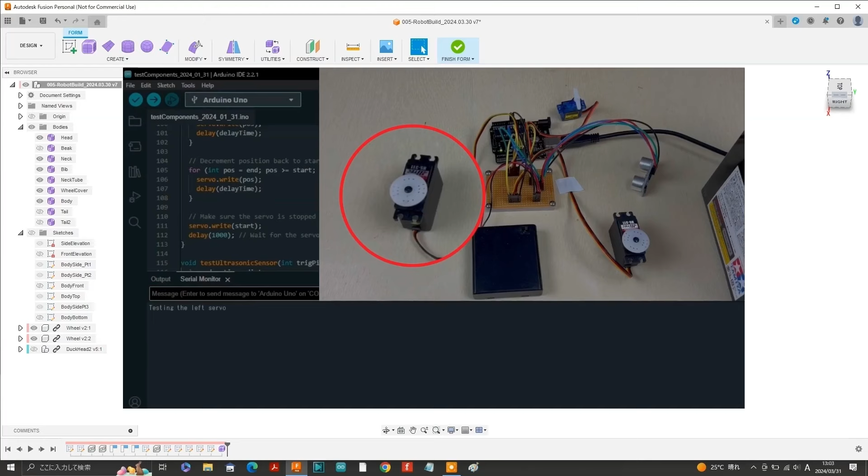In part 5, we conducted operational testing of the various components connected to the circuit board and confirmed that our design works perfectly. Now in this video, and in the next couple of videos, I'll take you through the design process. Initially, I designed the chassis without a finalized body design, resulting in an over-engineered structure that somewhat resembled a station wagon. Instead of just slapping body panels onto this chassis, I decided to start afresh by designing a robot body first. And here it is, a sleek aerodynamic design.

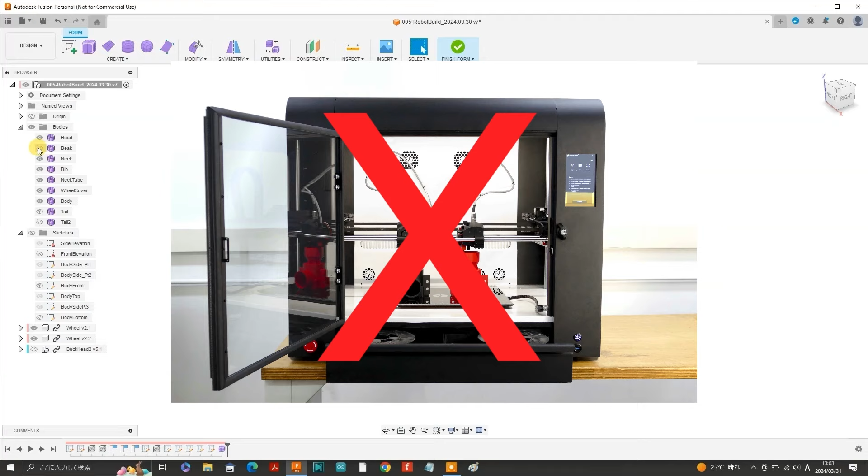Believe it or not, I'm going to create this robot body without a 3D printer. I'll be making the molds from scratch, and I'll use vacuum molding for the various curved panels. I'll be using a 0.5mm thick Tamiya Plate plastic sheet for most of the body shell.

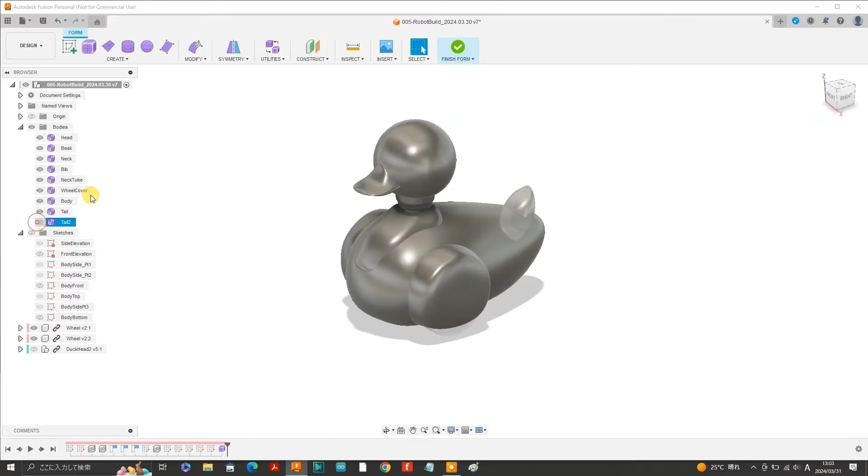But there's more to this story. The youngest member of my family insisted on a deluxe version, complete with this beak and tail. Some might say it resembles a duck, but I don't see it personally. Well, okay, it's a duck, okay? I'm making a robot duck.

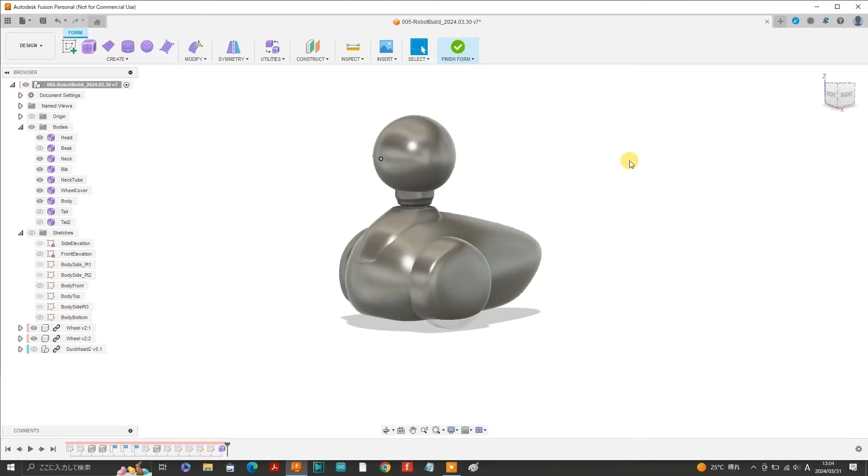If you've been following along since the beginning, don't worry, you don't have to build a duck like mine if you don't want to. I'll show you how I modeled this design in Fusion 360, so you can create your own unique non-duck robot design if you prefer. So open up Fusion 360. I'm just using the free version.

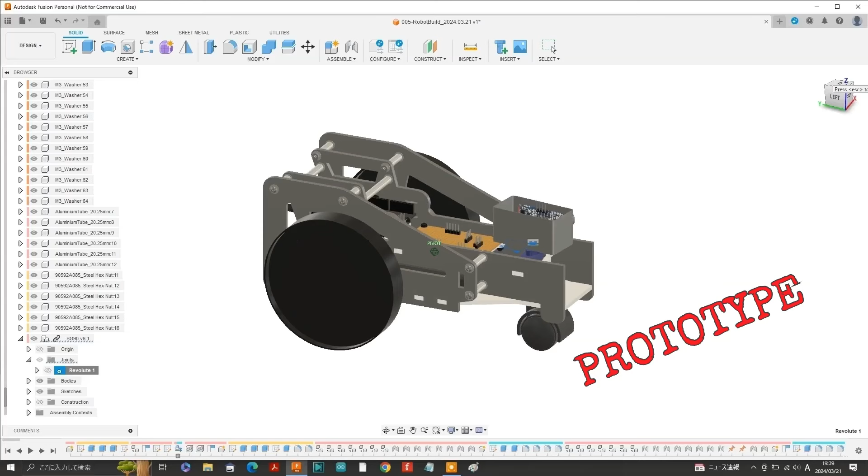First, we'll start by drawing the left and right wheels that will connect to the left and right servos. You might remember from part 1 of this series me showing you these black lids, which are 113mm in diameter, for use as left and right wheels. These are the same wheels as the prototype design I just showed you. However, upon finalizing the design of the robot body, it became apparent that the wheels need to be scaled down in size in order to remain in proportion with the head of the duck. So I'll be using these much smaller diameter lids instead.

I will not keep them pink. I will color them yellow with an epoxy yellow paint, which hopefully should hold, even though they are made of PP or polypropylene, which ordinary paint would not hold onto very well.

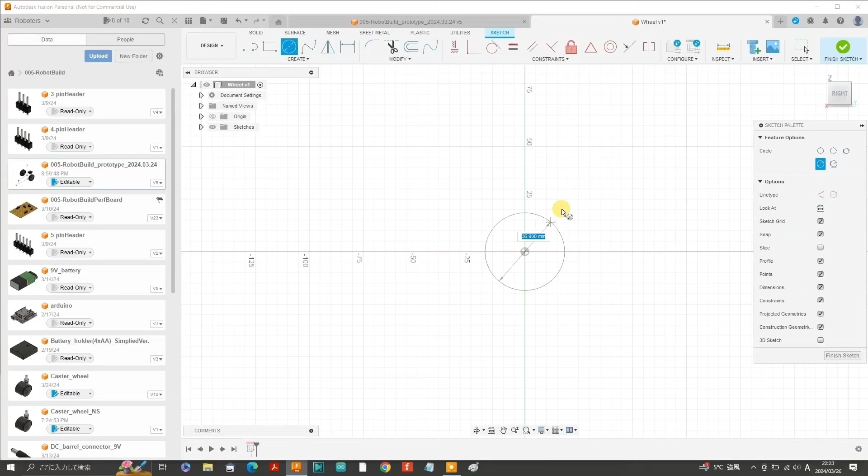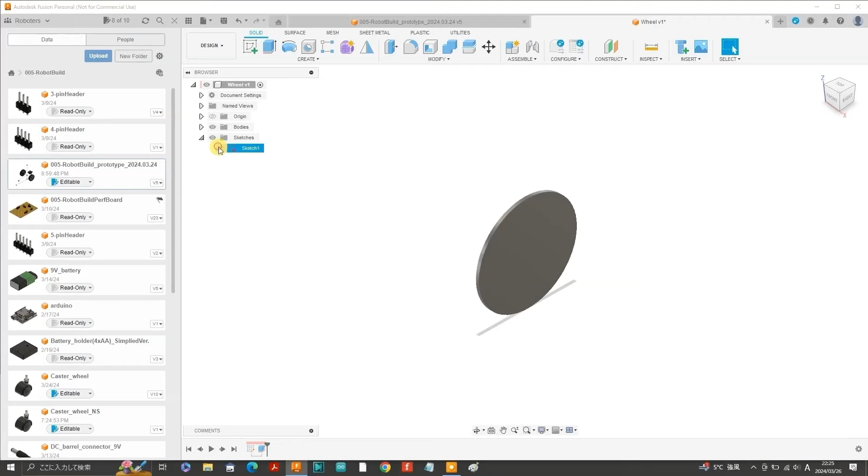I've created a component and labeled it wheel. Create an outer diameter of 66.4mm because that's the size of the outer diameter of the new lids I'm using now. As you can see, I have an inner diameter of 64.4mm so that the peripheral thickness is 1mm. Anyway, extrude the thickness in the middle there by 2mm. So I might as well do some knurling because the lids I'm using are knurled.

To do that, we edit the sketch. I've put in a dimension from the top of the outer circle of 0.5mm, so pretty small. Draw a 45-degree line from there toward the left and then make the end of that line coincident with the outer circle. Then mirror that line for the right side to create a V-shaped notch.

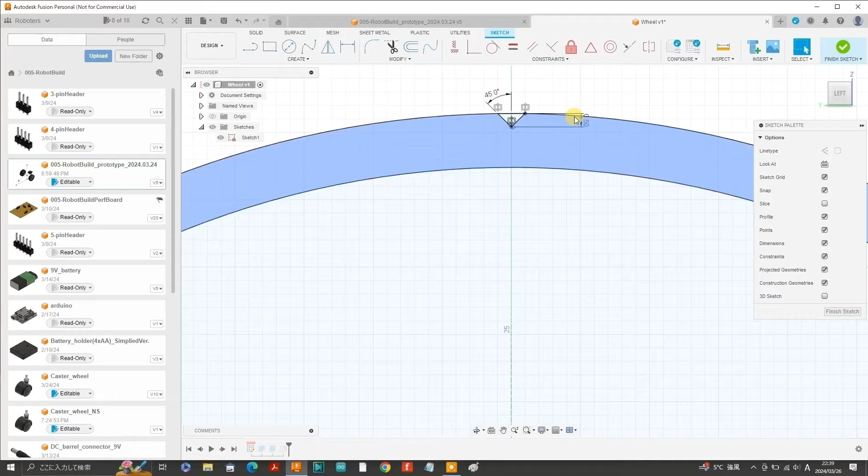Now we can create a pattern by selecting circular pattern from create. Select those two sides of the V-shape as objects. Select the center of the wheel as the center of the pattern, and then add the quantity. So the default value is 3, so let's try 30 for a start. They're still quite widely spaced apart, so we'll ramp that up to 100. Looking pretty good, but not quite there, so let's try 120, which is better, but could still do with a few more, so let's try 150.

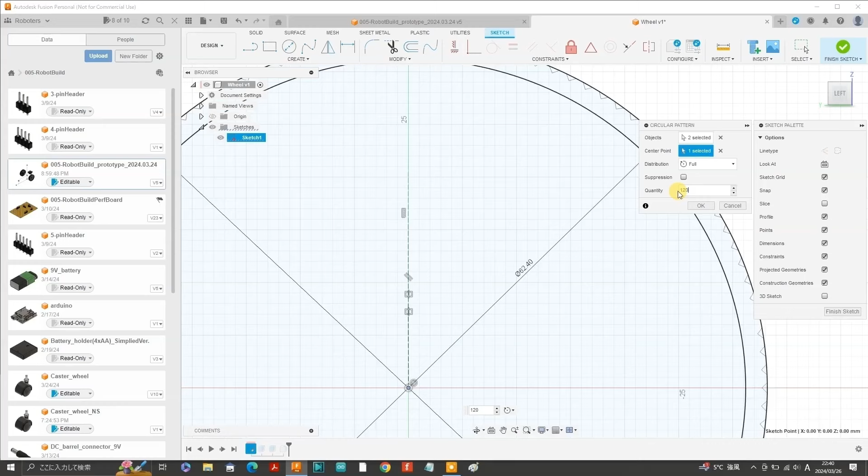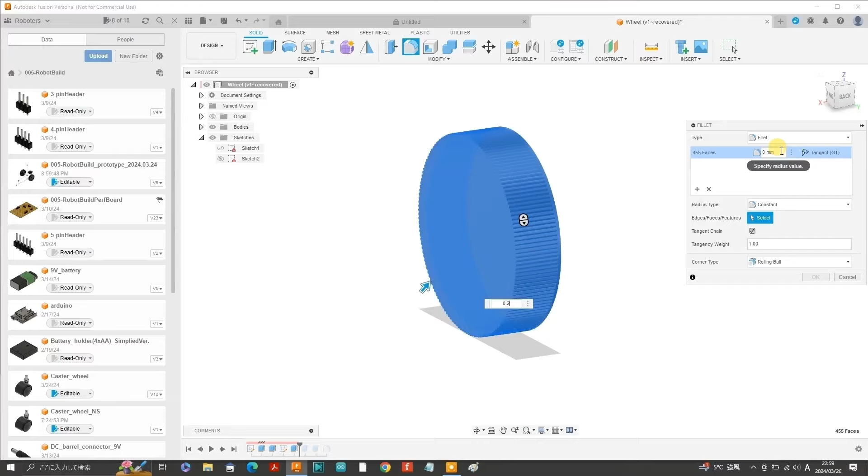Finish sketch. Okay, now we can select the outer rim in one selection, which selects the entire rim minus the notches. I adjusted the extrusion amount down to 15, or minus 15 actually, and added a 1mm non-knurled rim on the back, just like on the actual lid. Then I did a 0.2mm fillet on the entire component, and that is the wheel completed.

Now I have opened up a new file, selected sketch, and here I am selecting the vertical YZ plane.

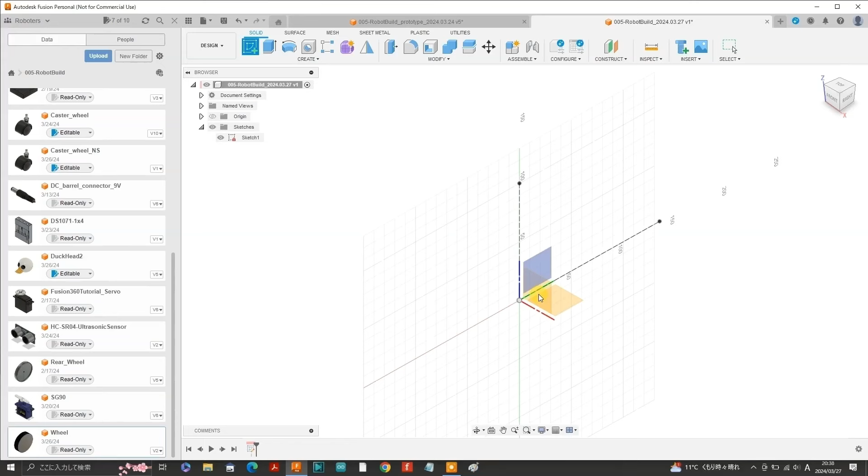Create a horizontal construction line, 135mm, and a 100mm vertical construction line. These lengths are fairly arbitrary. Select sketch again, and this time select the vertical XZ plane. Put in a rightward extending horizontal construction line at 50 millimeters. Again, just an arbitrary value.

I might label these sketches so I don't get lost. Front elevation for the current sketch and side elevation for the previous one. Dimension the left construction line. Finish sketch, and there we have the basic construction lines.

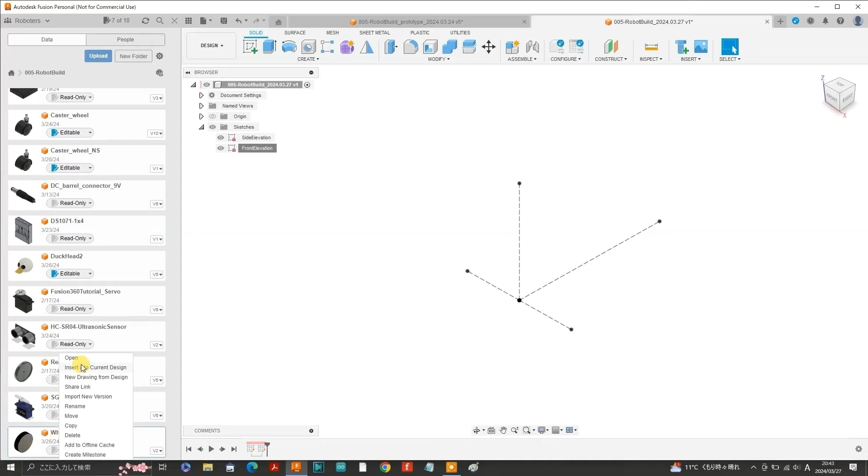So let's insert the wheel into our current design by right clicking it and selecting insert into current design, and we can initially move the wheel along the X direction by 50 millimeters. Let's make a copy of that and move it over to the other side, and then rotate by 180 degrees. As you can see, each wheel is located at differing positions, so let's align each inner face to each end of their respective construction lines.

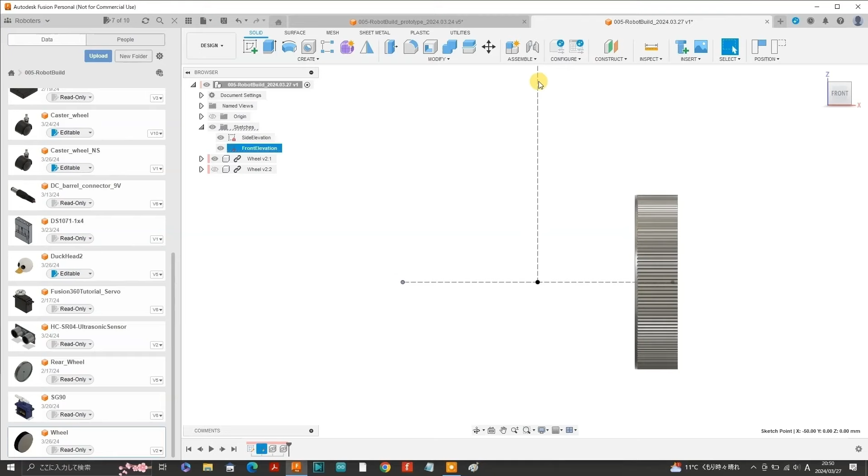Okay, here I've progressed on to sketching out the outline of the body. I've been using the spline tool for most of the curves, except for the circle surrounding the wheel. Now, because we are only constructing a body outline for reference purposes, and we won't be extruding any of the shapes, these sketches for the body do not need to be constrained.

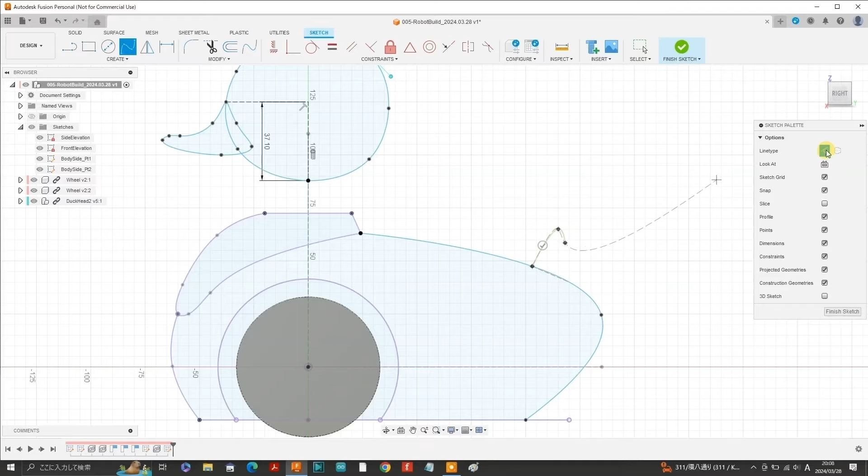The spline tool is quite easy to use. You need to select a starting point, choose arbitrary points along a path of the curved line you are creating, and then select the end point of the curved line. Here I am designing the tail shape.

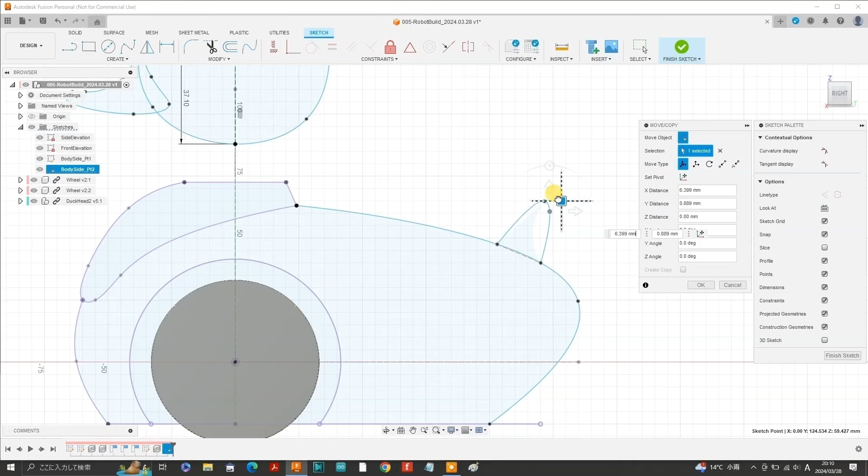Okay, but once you have sketched the curved line with the spline tool, you can select one of the black points on the line, right click to display the menu, select move copy, and I find it easiest to grab the little square that allows you to move the point in both the vertical and horizontal directions. So you can move it around just like this. Just finish off the tail part, and there we have the side elevation finished.

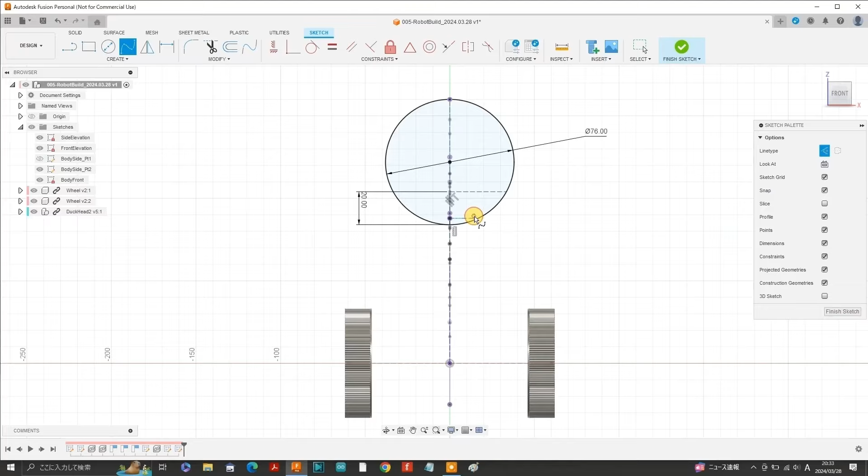Here I've created another sketch for the front elevational view with a 76mm circle for the initial shape of the head. Again, these are just reference lines for when we use the form tool to create the 3D body. Well, I think the head will look better if it's not a perfect circle, so we'll put in a random reference line and use the spline tool to sketch a curved line inside the lower part of the circle here.

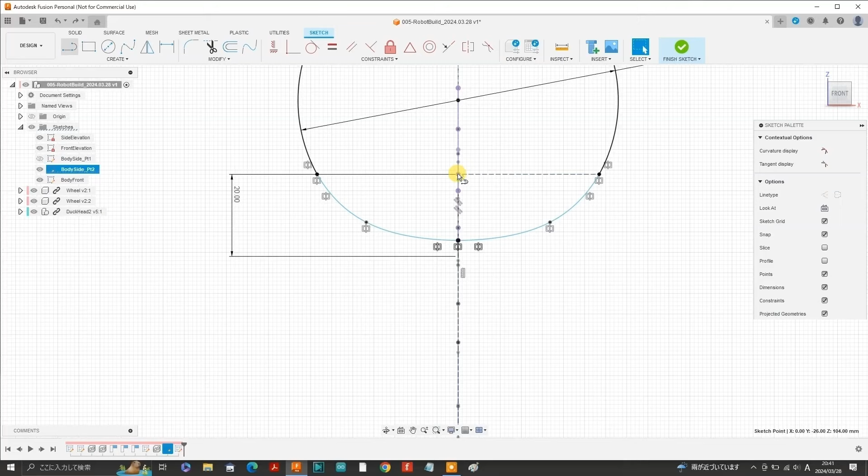Move the midpoint of the curve. Then I just use the mirror tool to do the other side, and then chop off the original line of the circle with the trim tool. Okay, now it's time to sketch the front view of the beak. You can swivel the drawing to confirm what the various dots on the vertical line here represent in the side elevation so that the front view of the beak aligns properly.

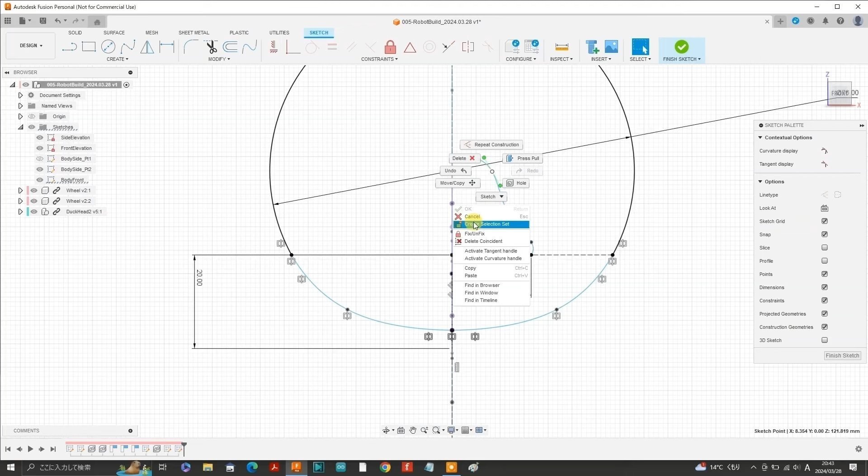As you can see, I've put a horizontal reference line at a length of 16.5, which I think makes it a bit easier to sketch the line with the spline tool because you're providing a specific end point for the curved line. So once again, you can select a black point and right click, select move copy, and move the point to adjust the curvature. Okay, so we have the right side of the beak, so let's mirror that. I've deleted that initial dimension of 16.5 to free it up for further adjustment.

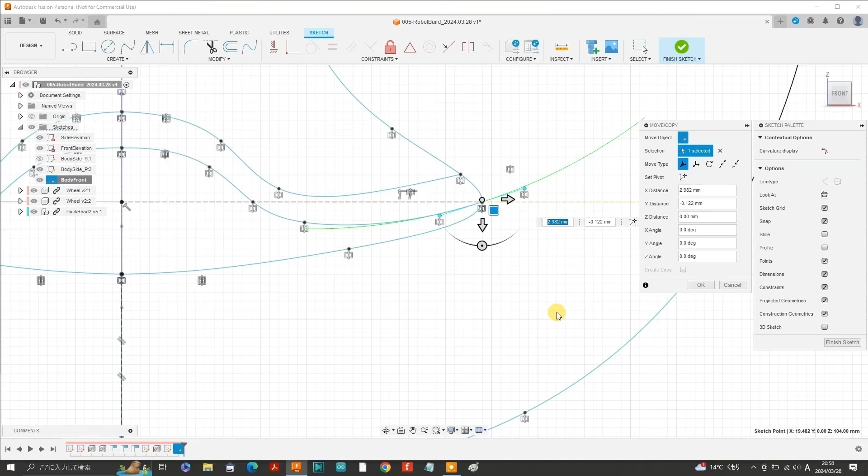You can play around moving the points on the curves until you arrive at a profile shape that you are looking for. So it's really just a repetition of the same principles to construct the outline sketch of the elevational views. So here we have the initial neck, which will be changed later, and the bib portion sketched in. Also, because the lines created with the spline tool don't automatically constrain upon arriving at a destination point or line, you should select the tick mark that shows up in order to finish the line.